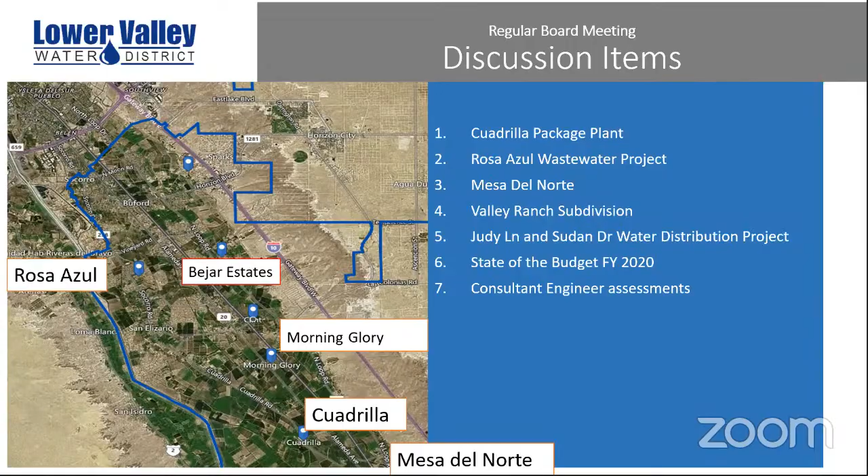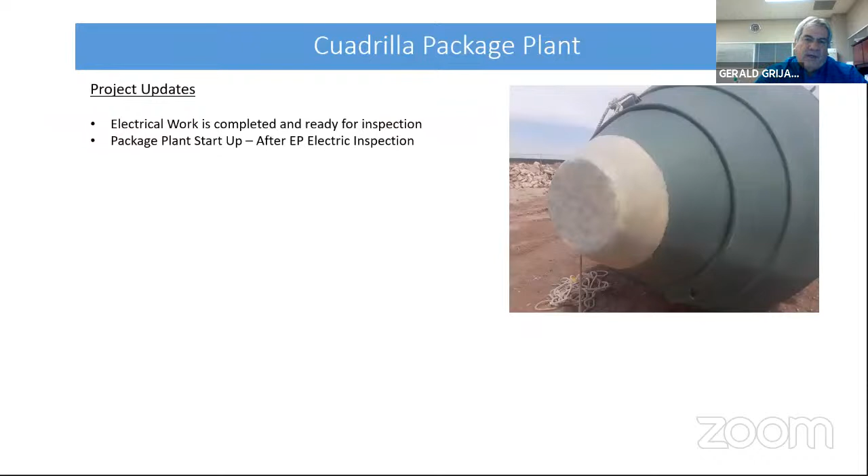Cuadrilla — finally, with help from our state legislature, we were able to get the county to recognize that we are the owners for Cuadrilla and have the right to put electric power there. So it's been scheduled for within the next 2 weeks, and we'll have the plant up and running pretty much right soon after.

Rosa Azul — this is what the yard line connections look like. We're almost done with phase 1, which is the south side of Socorro Road in Rosa Azul. Once we complete these connections, we're going to move to phase 2.

We got a call from the NAD Bank this week, and they said they're going to put us on the agenda for their next meeting — that we have been approved pending board approval. So that's going to be interesting because we already started thinking they weren't going to give us any money at all, and now it looks like they're going to give us something. I don't know, we'll work it out with them. It could be about $500,000 worth of a grant.

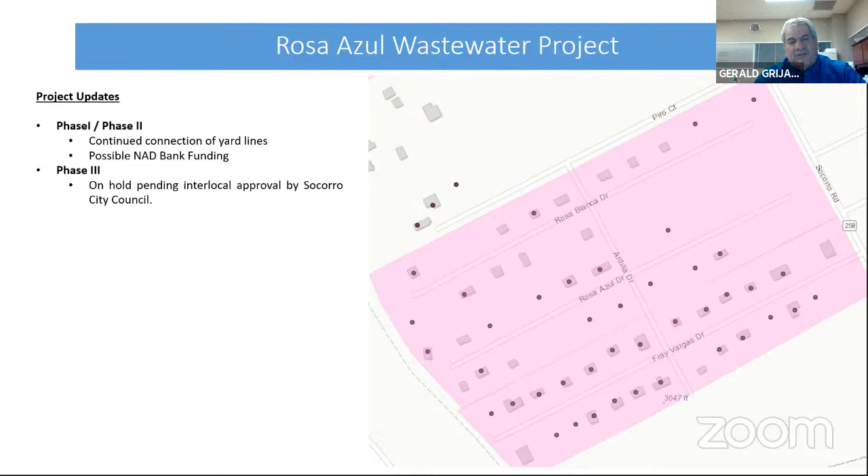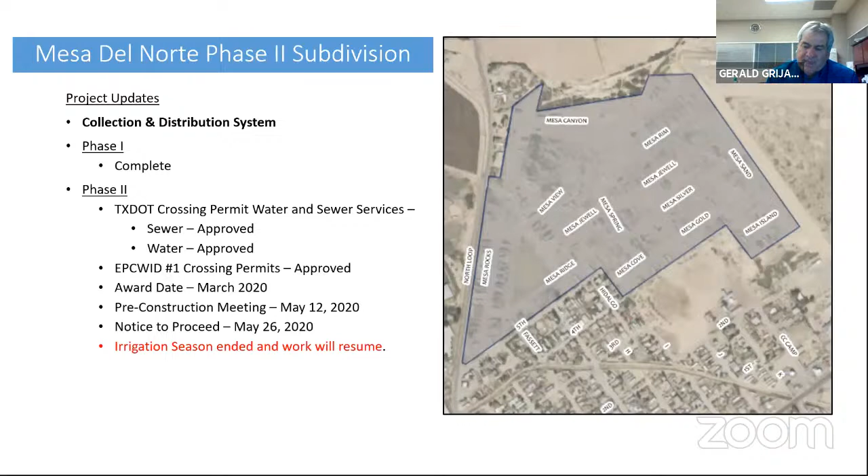Mesa del Norte — the irrigation season is over with, so we're about to begin that project as well. Judy Lane and Sudan Drive — we're done with Sudan Drive with the pipe. Now we're waiting on some parts to be able to finish all of the residential service connections.

Can you guys see those charts? Yeah, they're changing. Yes, they're changing, we can see them. All right, so we hope to be done with the Judy Lane piece within 2 weeks.

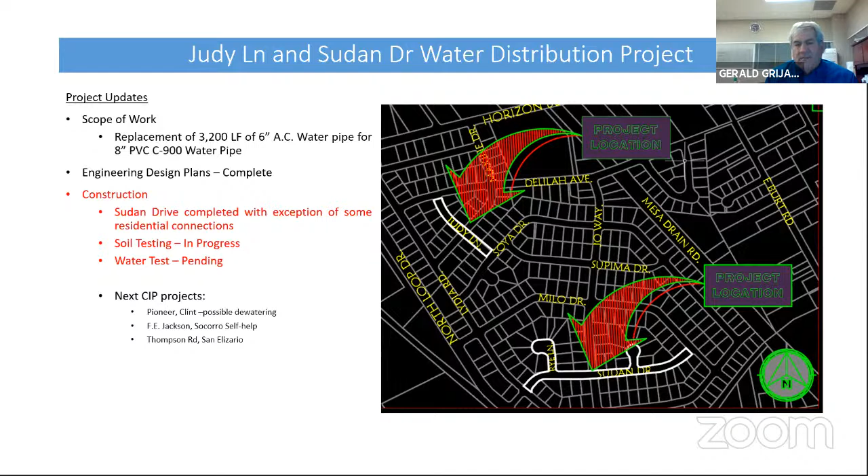Okay, and that's it for the general manager's reports. Now we have 3 consultants who are going to give you assessments of what they're doing on their projects. One is the 36-inch water main assessment, another is our manhole assessment, and the third is our water modeling from Nuevo Tanks Road to Horizon off of North Loop and to the freeway.

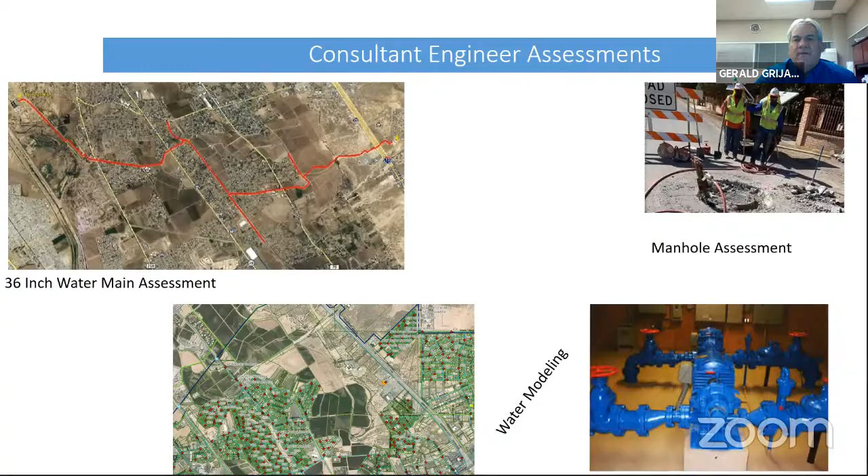So I think, Ed, you need to take over and tell us who's going to speak first. That would be agenda item number 13. Ms. Vigil, do you need to present that? Oh, you don't want it as part of the general manager's report? No, there's actually 3 different agenda items. Oh, okay, so let's just go on with the regular agenda then. Sorry, okay.

Item 13, presentation by FXSA regarding manhole condition assessment program and survey. I guess that's you, Mr. Etla.

Thank you, board members. We had tasked Frank Spencer and Associates back in August of this year to do a manhole assessment, evaluating all 4,500 manholes that we have in the district. I asked them to put together a presentation of kind of where they're at right now.

Marco was there, yeah. Is Marcos also on this online? He's a guy that dropped off for some reason. No, he's in the meeting. Is he? Marco? Is Marcos ready to do the presentation? Not hearing him. No? Marco, we can't hear you. Hello? Yes, now we can hear you. Hello? We got you, can you guys hear me? Yes sir, oh okay. I was wearing my headset and for some reason it stopped working, so it looks like I fixed it.

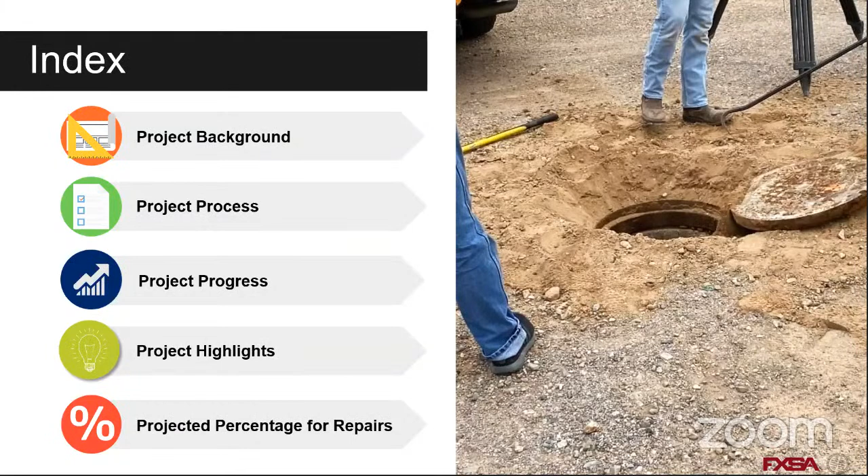The purpose of this presentation is to give you an update on the manhole condition assessment project for the Lower Valley Water District. I'll go over the project background, the project process briefly describing how it works, an update on our progress so far, and a few highlights—good and bad things we've found. At the end, I'll show the projected percentage for repairs based on what we've seen so far.

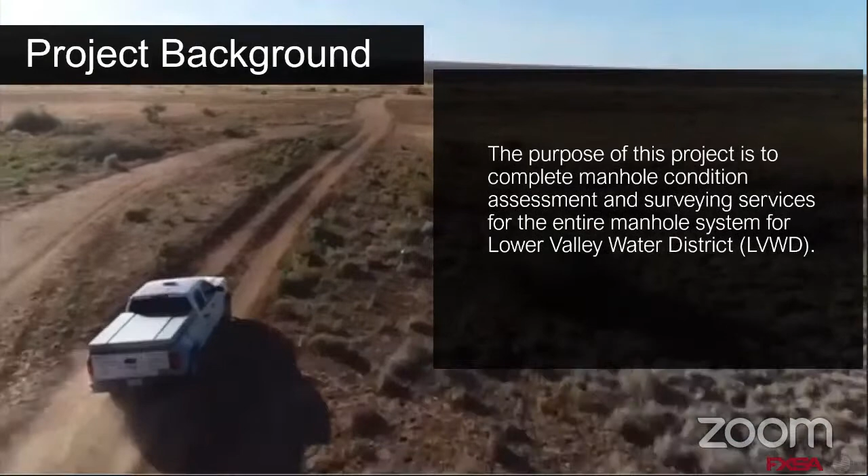Let's remember that the purpose of this project is to complete manhole condition assessment and surveying services—in other words, for the Lower Valley to know exactly what the condition of each manhole is at the end of the project.

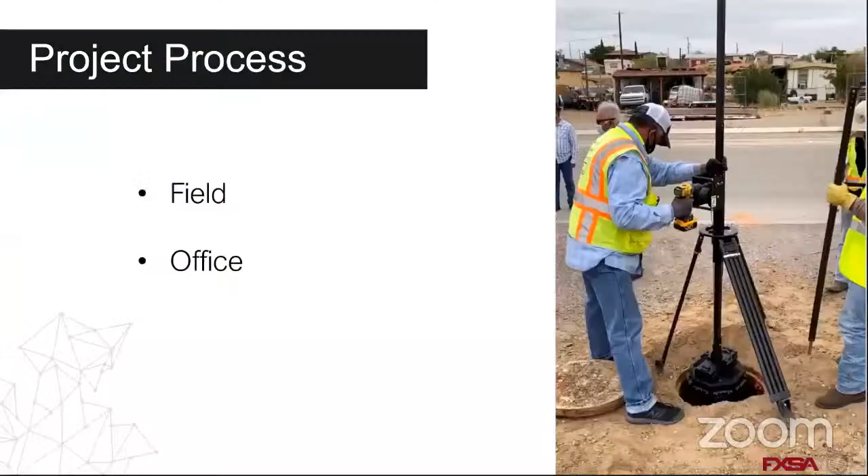There are two components: field work and office work. Manholes are identified first, opened and scanned, as you can see in the video. Then all data is processed in the office—defects identified, measurements taken, and scores given to each manhole. It's a complex process step to manipulate the data and develop the scores. You actually spend more time in the office looking at videos and images than in the field. I could speak for days about the things we do in the office, but at the end of the day, the process is divided into field work and office work.

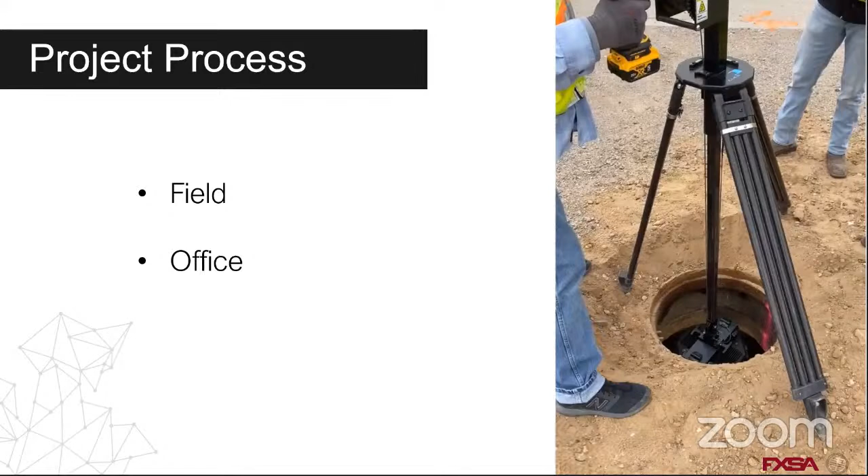If at any time someone is interested in learning how the process has been done in the office, I'll be happy to show you more details.

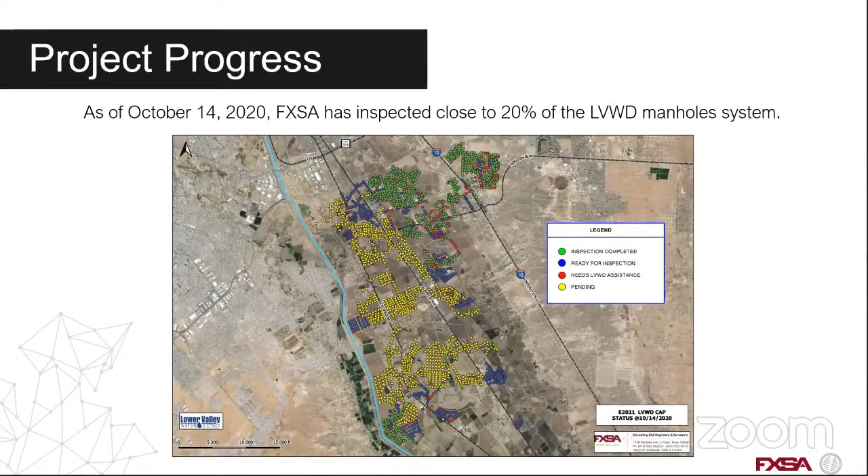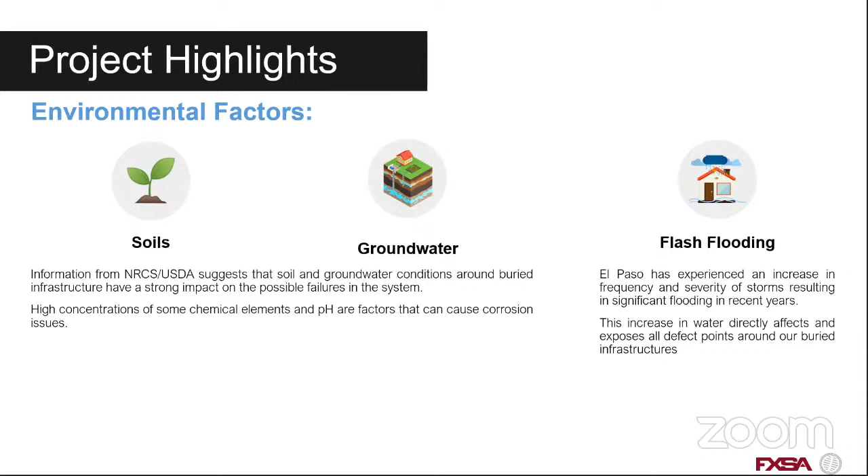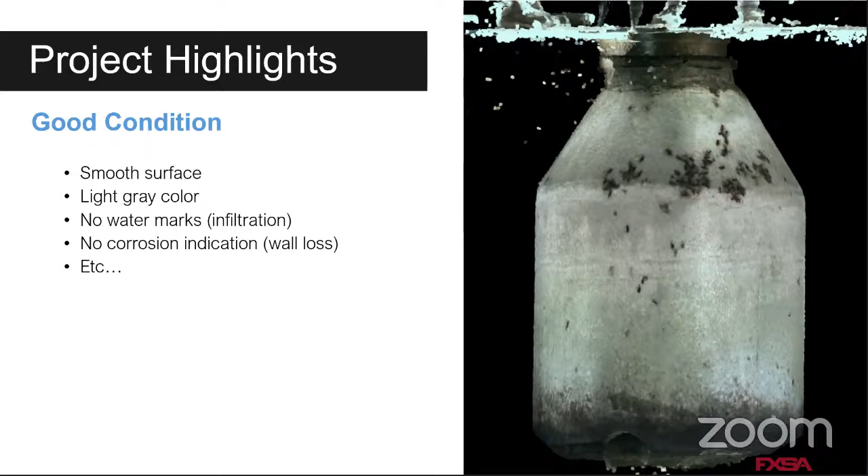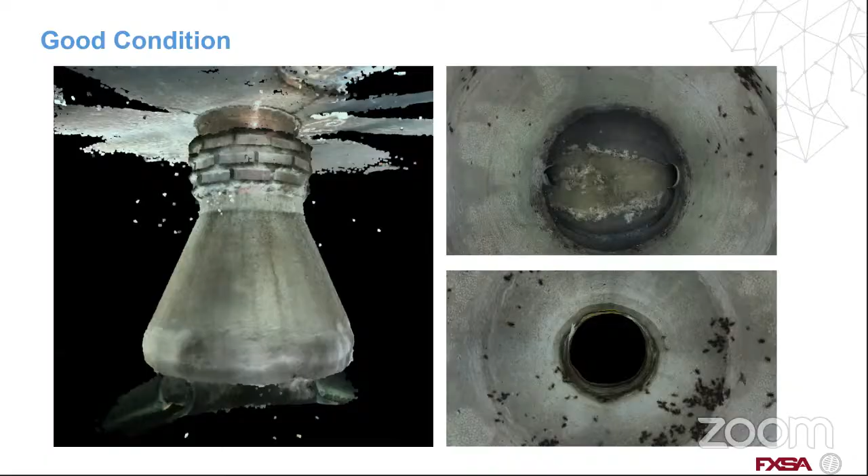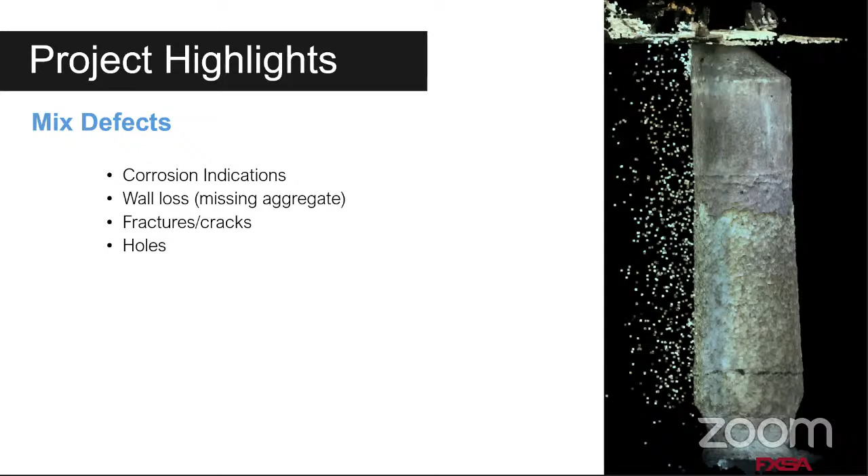You will experience less flowing into the next manhole. You can have backflow problems, and this is a big issue.

So this is something that needs to be addressed fairly quickly. Everything, do not panic. Everything has been informed to Lower Valley. You guys are moving in the right direction, taking measurements to attack these issues. But it's unfortunate that in some cases the issues are already in a stage that could potentially cause major problems if not addressed quickly.

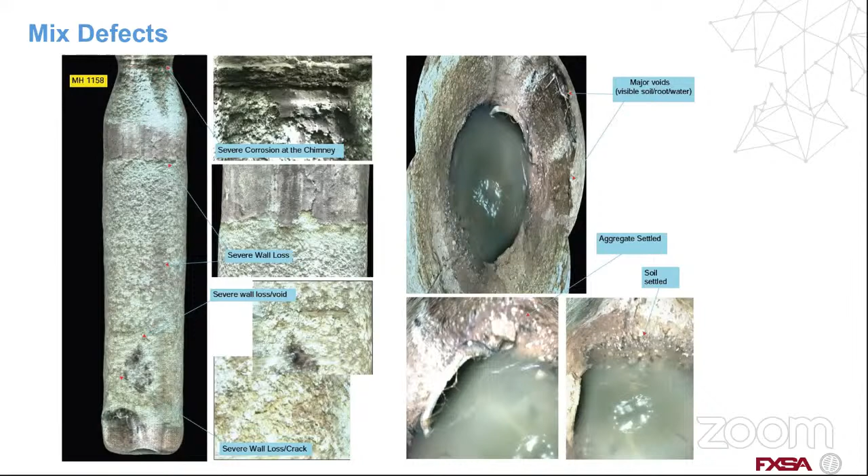Another example that we found so far, this is a manhole that is sitting in an arroyo. This is what is called a contamination of a potential source of drinking water. This is a big issue sometimes to agencies like TCEQ. They don't like seeing this, meaning you have a potential contamination to a potential source of drinking water.

My notes here are that this manhole already failed, is leaking into the arroyo. I was informed that there was some repairs already addressed, so Lower Valley took action on this one. That is great. You may want to consider, though, relocating this manhole. It's not in a good position. It's not good for us, or for you, to have it there.

It's above the ground, about 14 feet, so inspection makes it difficult to also inspect it. And at the same time, you still have the potential to leak into what is called a potential source of drinking water, which is a big no-no sometimes, again, for agencies like TCEQ. I just wanted to bring that up again, but I know that Lower Valley has taken action on this one.

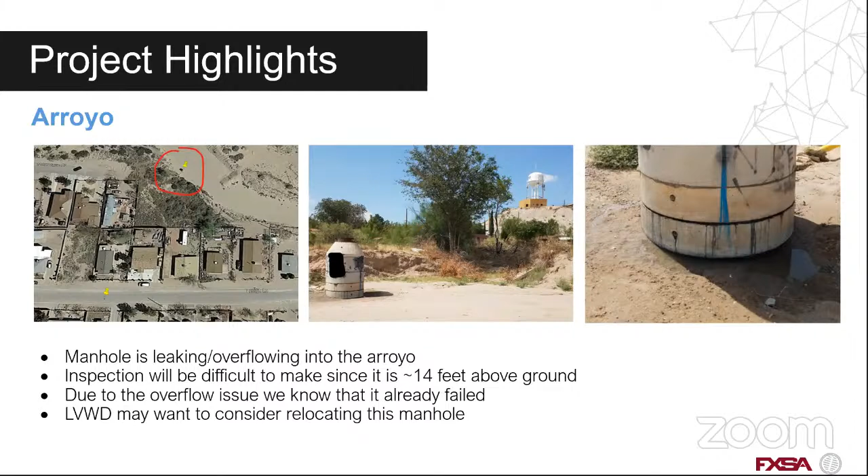And before I finalize this presentation, I would like to highlight one of the most common problems. I was already expecting this. We've seen this all over the country, not only here in El Paso. Statistically, manholes that are near the station tend to degrade a lot faster, and the main reasons are the depth and the higher concentration of corrosive gases.

The side wall on the left, you can see it's not smooth, it's not a smooth vertical line. You see all that aggregate is gone, it has been eaten away. You're talking about replacing this manhole.

So again, this is another example that I wanted to show from what I was expecting to see closer to the lift stations. And if you think about it, you have 16 lift stations, you're probably thinking about seeing this problem, the severe corrosion, on maybe 5, maybe even up to 10 manholes closer to the lift station. So you're talking about maybe 160 manholes that we know statistically, and we've seen a few already, that will be in very bad shape. It is unfortunate, but that is what happens because they're deeper, they have more concentration of gases being accumulated. So those are the main reasons.

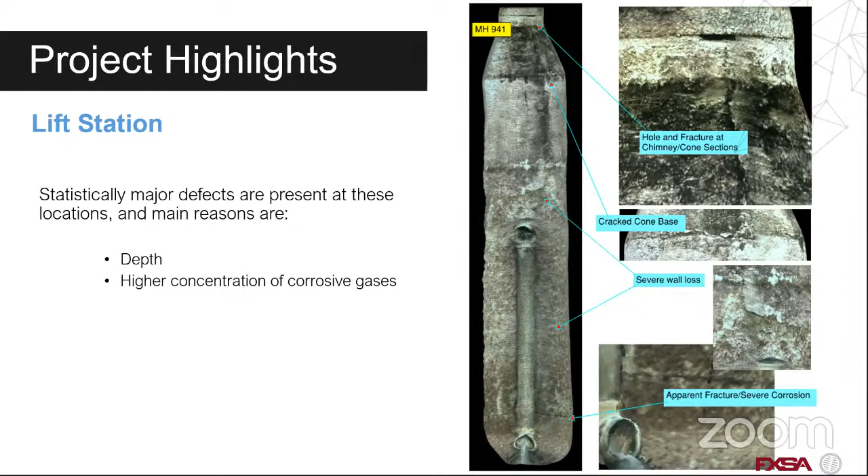Also, the manholes that are closer to the treatment plant, you will likely see these issues. So again, those were quickly some of the highlights we have seen: environmental issues, a combination of defects, and maybe some of the more severe ones closer to the lift stations. To end my presentation, I'd like to mention that we anticipate a high percentage of manholes in the system that may need to be repaired.

Now, what does the high percentage mean? This is not your typical 85 to 95%. Imagine that - that would mean you have to redo the entire system in the whole district. No, this means in terms of rehabilitation and replacement. In this case, you're looking at what is called the off-ramp, anywhere from 15 to 20, maybe 25%, of the total number of manholes that may need to be replaced instead of rehabilitated. That's what the high percentage means.

I don't want to confuse anybody - I just wanted to use the terms I used out there. A high percentage, again, is between 15 to 25% of the entire system. That means if you're doing rehabilitation of 25%, for example, of manholes in the system, you're throwing money away. From then on, you're looking at replacing only instead of rehabilitating. At that point, the rehabilitation option becomes null, becomes invalid, and you've got to think about replacing.

Let's see. So hopefully everybody can see that. So what you see in front of you is the 36-inch transmission pipeline route.

Like Ed was saying, it provides a big part of the water service for the district. It begins here at the Jonathan Rogers Water Treatment Plant and then proceeds easterly, crossing the American Canal, Franklin Drain, going through some farmer fields. There's a school right in this area right here. This is Bovey Road. Crosses Alameda Avenue.

Then it parallels Middle Drain Road, continues down to Bowman Road, and then up Bowman Road, right in front of Robert Rojas Elementary. Continues easterly, gets on the Mesa Drain, goes through some more farmers fields, goes up here in the escarpment up towards the interstate, and then right here at I-10 it crosses the interstate. There's a big casing right there that it crosses the interstate with, and then to your Mitchell Reservoir is right in this area. About 8 miles.

It's a 36-inch steel pipeline, tape wrapped, with a mortar lining on the inside. All these little blue circles are your isolation valves. There's about 20 of them. They're called butterfly valves, and they're along the entire route.

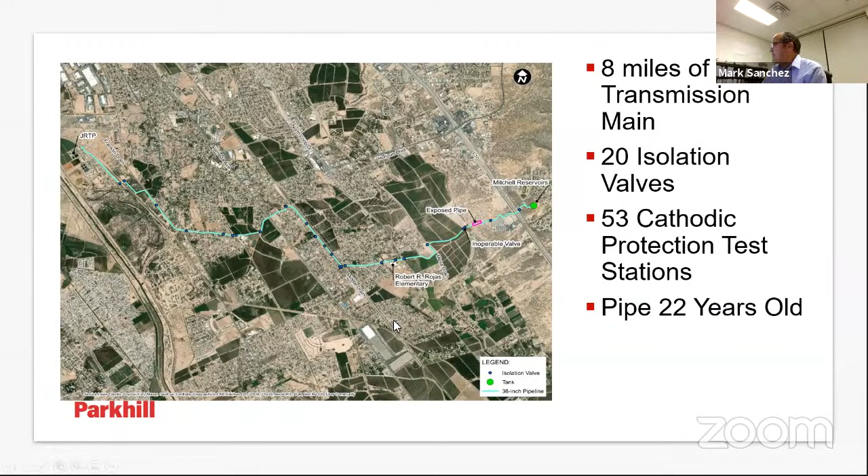We'll go to the next slide. So the first task was to get out there and do an inspection of the entire 8 miles of pipeline. We went out there and popped every manhole that we could find. Like I said, there's 20 isolation valves, but on top of that there's about 30 other valves, called air relief valves, combination air relief valves, and blow-off valves. We tried to locate all of those, pop the lids, look inside of them, take pictures, and assess the condition.

Accessibility was another factor. A lot of what we need to do is find these cathodic protection test stations for the corrosion survey that we're going to be conducting.

We located 27 of the 53 CP test stations. On the right side of the slide is a typical CP test station—basically a valve box with some conductors, wires tied together, and a couple of wires that connect to the pipe with a testing board. There's 53 of these, and we were able to locate 27. A lot of them have been covered up, dug up, or damaged. We had to get a pipe locator out there to uncover and locate some of these, and fortunately we were able to find them. These are real important, as we need them for conducting the corrosion survey.

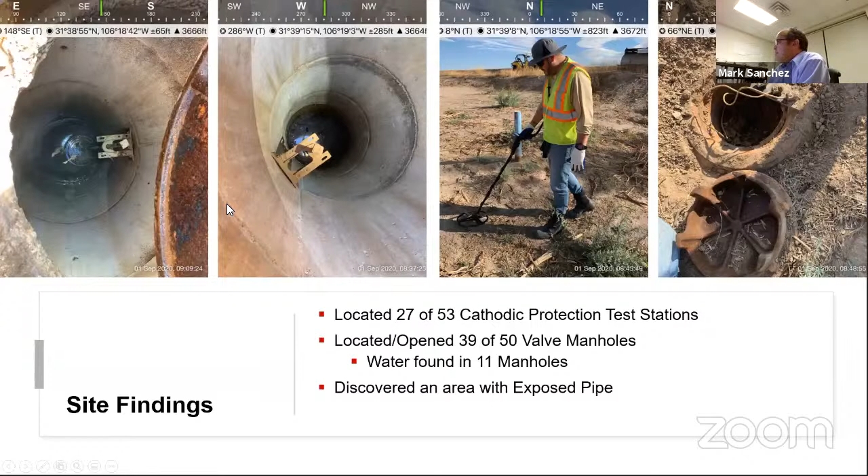We also discovered an area with exposed pipe. Look at the next slide here—this is near the interstate, just south of the interstate. We found about 100 feet of exposed pipe.

We're going to be looking at some ways to try to mitigate this. The good news is the wrap is in good condition, which is surprising since it's been exposed like this. The wrapping system on this pipe consists of 3 layers, so it's a very durable wrap that protects the pipe from corrosion—so that looks good.

But the key thing is we've got to get that covered up. We're going to look at some options, including a concrete slab—we'd put some fill on top, then a concrete slab. The bigger issue really is the flooding, so we'll try to mitigate that as best we can. There are bigger issues with the overall flooding in that entire area, but the main thing is we've got to figure out a way to protect that pipe. We'll look at some options for that and provide costs on how to attack it.

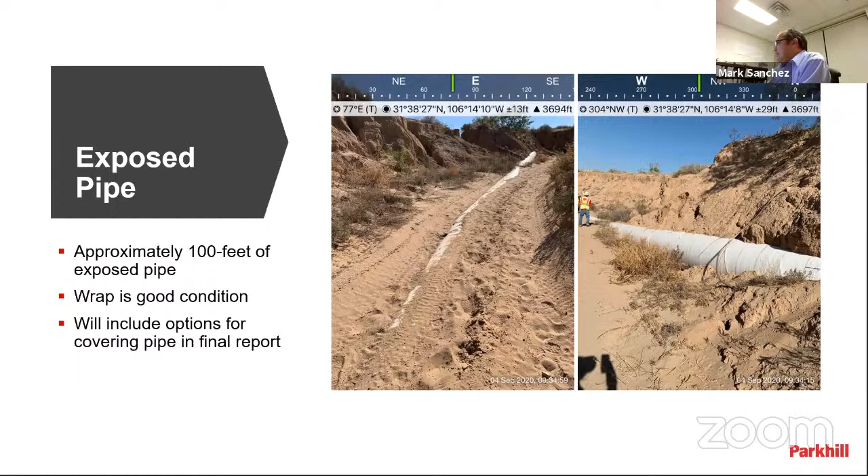As I mentioned before, the pipeline is protected by what they call an impressed current system. That current system basically requires rectifiers—there are 2 rectifiers on this pipeline. Basically, what these rectifiers do is take alternating current and convert it to DC current, and that current is applied to the pipe to protect it from corrosion.

These were the original ones installed in 1998. During the inspection, we discovered they haven't been working—they haven't been operable since 2018. We contacted a local corrosion company called Lonestar Incorporated. They have a bit of history with the Lower Valley and do a lot of work in the area. We went out there and met with the district and them, looked at the rectifiers, and they need to be replaced.

They provided a quote to us, which we have provided to Lower Valley Water District. I cannot stress enough how important these are to get working again. These are the backbone of that system, and we need to get them working as soon as we can to protect your pipeline, and on top of that, we need these working for the corrosion survey we plan on doing.

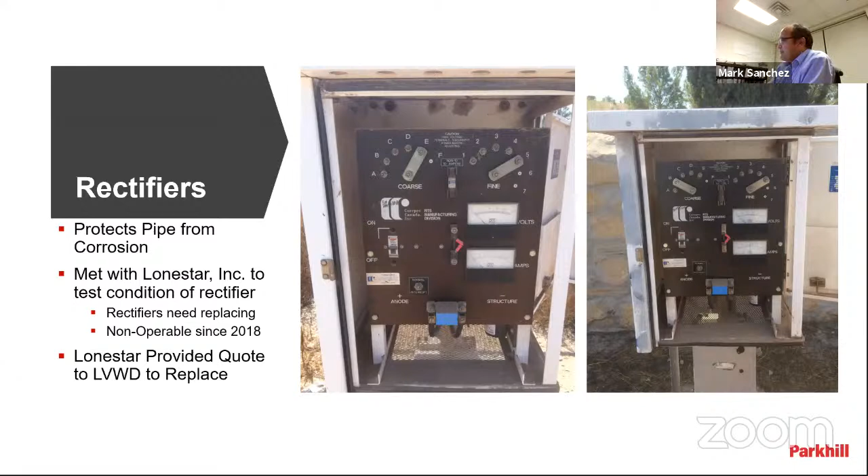The other thing we're doing is we've contacted a couple of specialty contractors that specialize in exercising valves and doing rehab on them. We met with one of them already and went out to look at a typical valve installation, one right next to North Loop and Bowman. They took a look at it.

So we had two contractors looking at this. They're going to provide us some budget numbers. The nice thing about these particular valves is that 95% of the problems that happen with them is the gearbox. And the nice thing about replacing those is you don't have to open or close the valve. The gearbox, from talking to these contractors, can actually be taken off and replaced with a new one, and 95% of the time that's going to take care of the problem with the butterfly valve.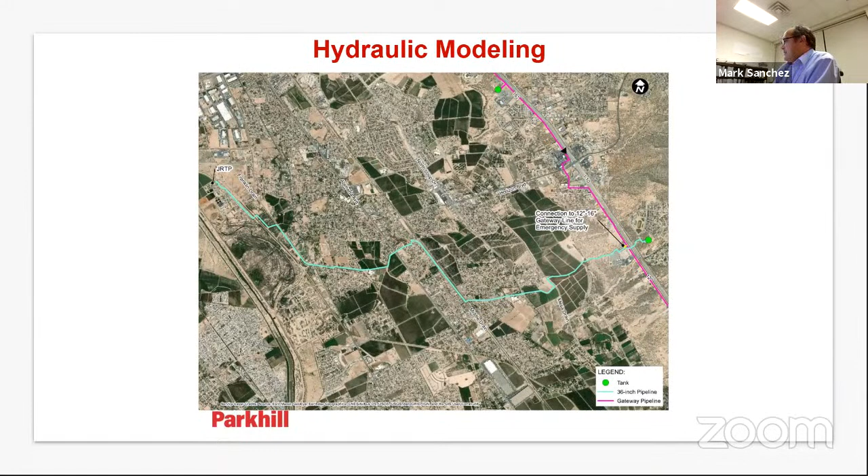But because of the rectifiers not working, we're having to get those fixed. Based on the lead times it takes to get those rectifiers fixed and then some time for installation, we're not going to have those working probably until January.

And so that delays the over-the-pipe survey, what we call the corrosion survey. It's actually called the over-the-pipe survey. We wouldn't be able to do that until the rectifiers are working, which I'm anticipating in January, assuming the district approves their quote and issues a PO to Lone Star and they can get those ordered.

Once we do that survey, we'll compile the draft report with our recommendations and review that with the district, probably a presentation to you guys. Then we'll finalize that report with recommendations and prioritized projects, with a plan to attack whatever we find out we need to do by March of 2021. So that's the schedule, and that's a little bit about where we're at and the progress to date. If anybody has any questions, I will try to answer them.

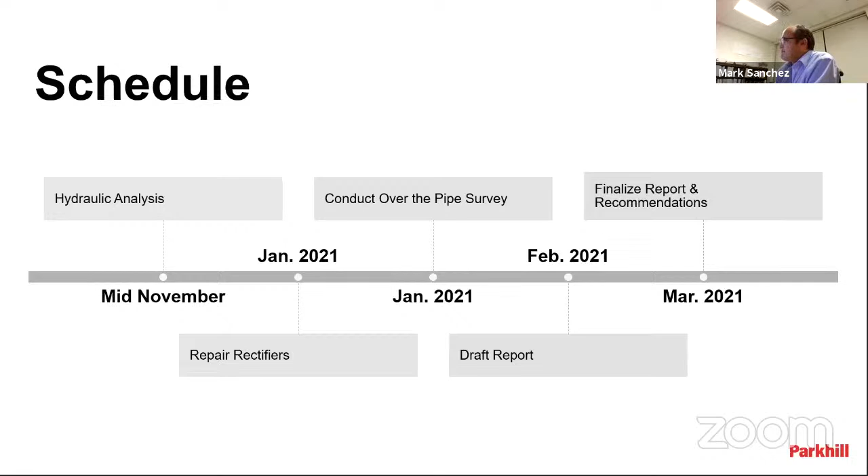Thank you, Mark. I don't hear anyone asking any questions. I think we're good until the next update. Yeah, I don't think there's any, unless the engineering committee has anything.

No? Just, do you have a quote in hand, Mr. Long? I don't have the numbers offhand, but I'll sit down with you all sometime next week and go over the one for the rectifiers.

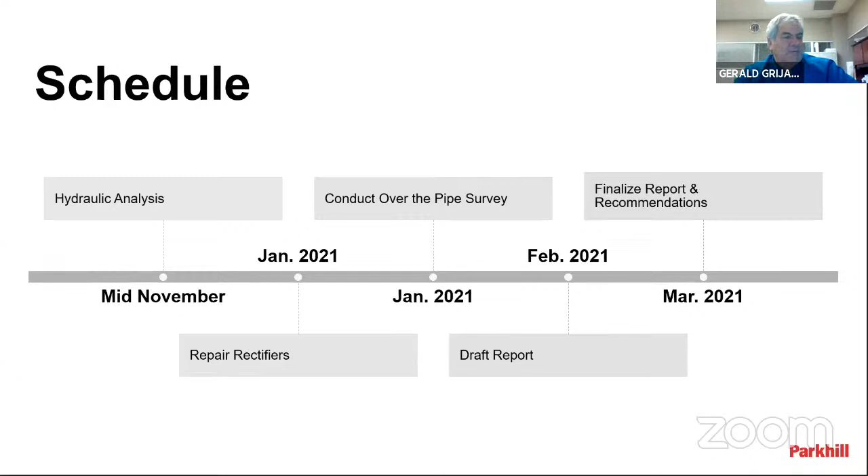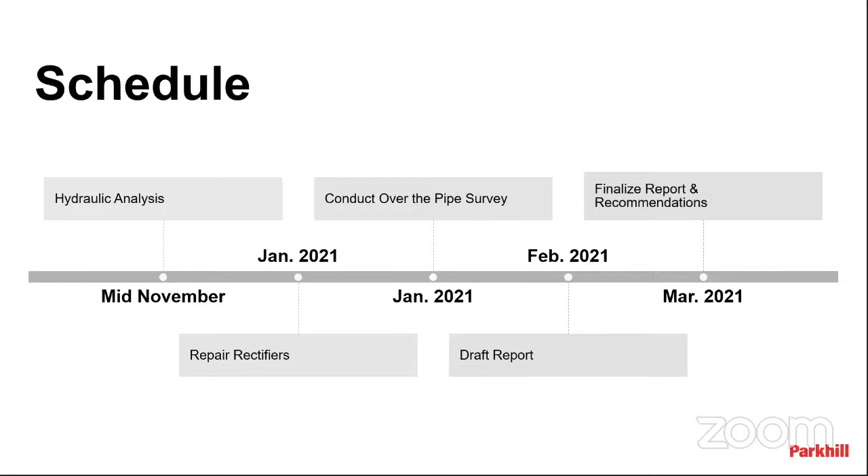Now, Ms. Vigil, we've got one more. Did you want to continue or postpone that one till the 19th? You've got one more what? One more presentation. Oh, it's up to you all. Which one is that one, Mr.?

Water modeling. We had tasked MCI to do water modeling of a portion of our district, and I wanted them to show their results. This ties in with a new tank they were looking at in the Hueco Tanks area.

Okay, let me ask you something. On this MCI presentation, because it's listed on the agenda, if I've been asked if we want to move it to the other meeting, are you all saying this can wait? Is it something you want to start working on? No, basically in the interest of time, your time, normally we don't take more than about 30 to 40 minutes of your time when we do presentations. Both of these took a little more than we expected.

I'll tell you what I'll do. Let me make a motion to move the order of the agenda, and depending on what time we're at after item 21, then we can decide. Yes? Oh, it's gonna be fast.

Ms. Vigil, if I may, I think pretty much these are just informational for us. So like Mr. Grijalva was saying, if they're willing to come back next meeting, I think that's perfectly fine with myself. I'm not sure how the other board members feel. And this is why I was saying let's move the order of the agenda. When we get to after 21, we'll see where we're at, and then we can change it and table it for the next meeting, okay?